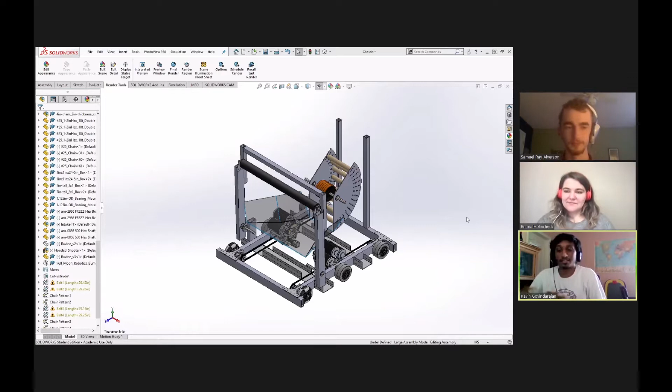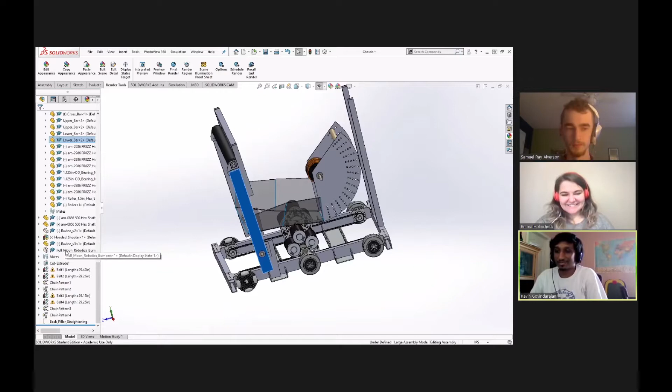So I'll walk you through the robot a little bit. So this right here is the overall structure of the robot. As you can see, you've got the main chassis drivetrain, you've got the intake right here, and we've got the ravine and the shooter. And this was one of the things I was saving for the special reveal right now. Earlier today, I spent some time modeling this beautiful bumper with our logo on it, just to give it that extra level of flair. That's excellent. I love it.

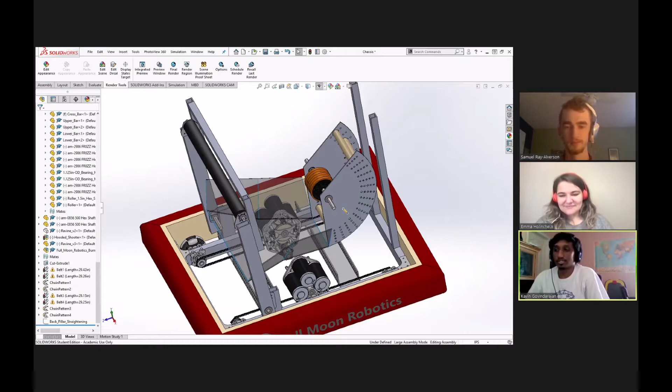So a little bit about the CAD. As you can tell, it's still a little bit bare bones. What's missing on this model right now is the electronics board, as well as any fasteners. And then the one major component that's still missing is the structural support for the shooter itself. The reason behind that is I am waiting for the dimensions from the in-person team. They had a lot of work to do today, so I didn't want to get in their way. So that's the last thing we're waiting for, the main structural stuff.

And then I've had to forego the electronics board and fasteners, partially due to time constraints since it was such a short time working on this. And also my computer was starting to struggle a little bit with the sheer amount of parts in there. So on the list for next year is a new computer for me.

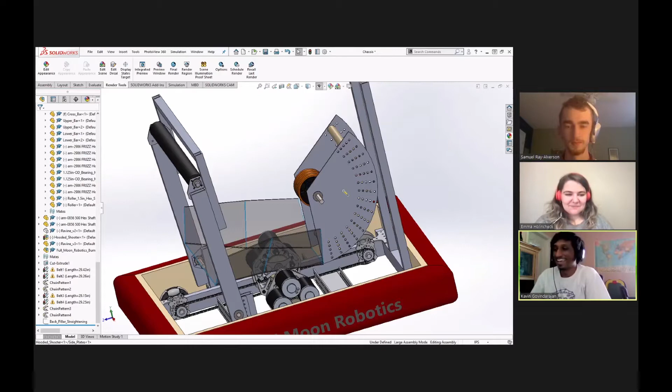Yep. And like I was talking about earlier, I had 3 different engineering processes I had to take, which was an interesting challenge working at home. Since we were redesigning the robot from last year, the first thing I had to do was reverse engineer the robot, like I mentioned, using pictures and working with the team in person. I had to basically reverse engineer the entire drivetrain portion. But when it came time to do the shooter, which I just pulled up right here, that was something we were developing new for this season.

So I worked in conjunction, in parallel with the in-person team at the RoboDogs workspace, and we were on call discussing dimensions, trying stuff out in CAD and in real life at the same time to design this shooter that we're using on the robot.

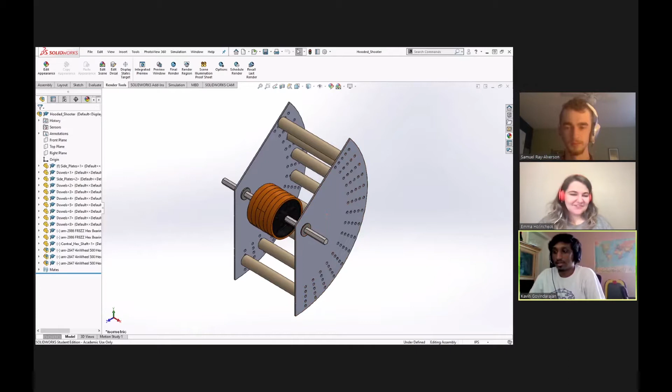And then the third process I had was with the ravine. And this was particularly fun, let's say. So this was something that I designed from scratch purely in CAD, because once I had the chassis CADed and the motors and everything in place, I now had a set of constraints to work with, and it was easiest to put it all in CAD and figure out what angles and dimensions all work.

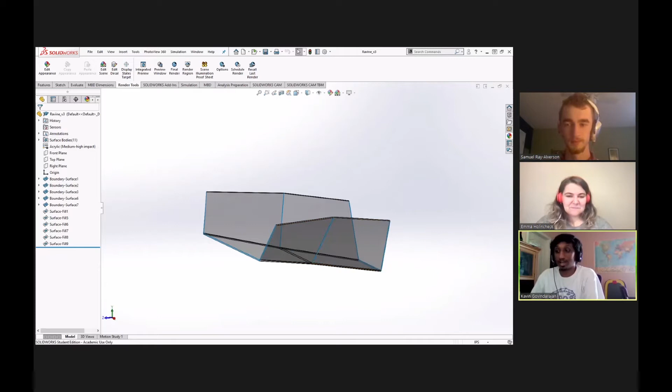So I spent a long time developing this in CAD, doing a bunch of 3D sketching, as I showed earlier, and finally came upon this final product. I sent these dimensions over to the in-person build team earlier, and they got it built, and it's on the robot now. So yeah, overall, CADing this robot has been a pretty fun experience. I've learned a lot, and I hope people watching the stream were able to learn a lot as well.

Incredible. Wow. Yeah. Cannot thank you enough for all of the hard work you put into this and how useful your work was for our in-person build team. So thank you again, Kavin. Absolutely. Is there anything else you'd like to share with us or anything else you'd like to say?

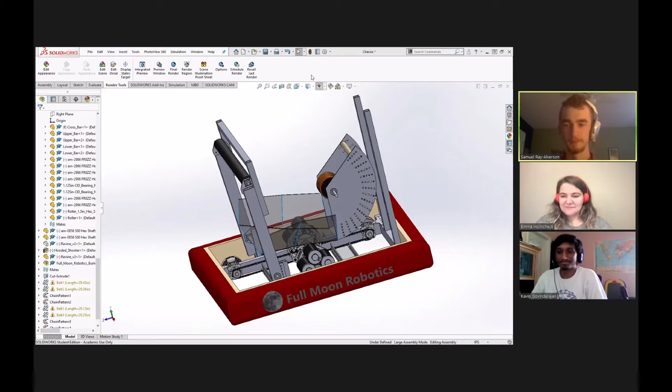So let's switch over now and let's talk to our programming team. Let's hear from Trevor. Trevor, how are you doing? Doing well. Good, good. All right. As I said to Kavin, it's been a very long 3 days. Where'd you start and where are you now?

Well, we started with last year's code, and there were a lot of things that were not entirely optimal, and a lot of things on the robot changed. And so over the past 3 days, we've sort of taken last year's code, and most of it's been rewritten. So yeah, it now accounts for all of the new subsystems and all of the new changes to the robot, including the shooter. We fixed some things with the control panel mechanism, and we made a whole bunch of other changes to it. We also did autonomous work.

And yeah. Excellent. Right. As of now, we have made 92 commits to our repository over the past 3 days and 18 pull requests. Cool. Wow. You guys have been working hard. We really appreciate all the work you guys have been doing.

All right. So tell me a little bit about the challenge of being virtual while working with a robot that you haven't seen before and you can't actually get your hands on. It was definitely a challenge because I'm used to sort of getting up close while I'm developing things so I can see, like, is this motor turning the way it should, or is this feed through the shooter working properly, which is a lot harder to do over, say, Zoom, but we made it work.

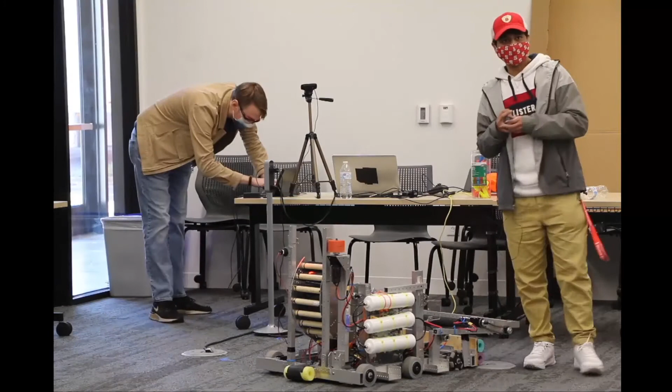Sure. On the back here is our shooter, which took a while to design. So basically our design process really early on in day one, we were thinking, okay, we want to score high goal, and we want to be able to score high goal from different points on the map. So how can we accomplish that without changing too much that we already had on the robot? So we came to the conclusion that a hooded shooter was probably the best idea to go about that. And we immediately began prototyping, designing, sketching out different strategies to make a hooded shooter. So that's pretty much what we have right here.

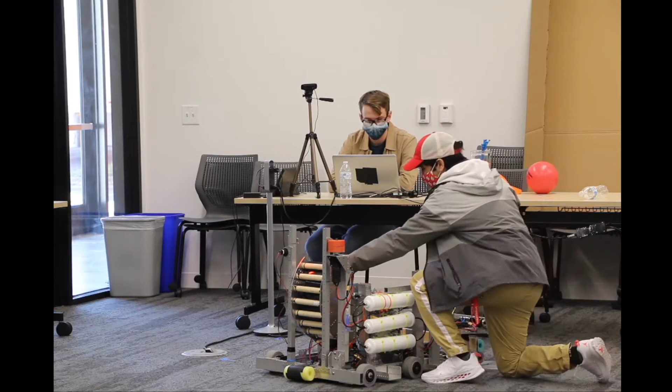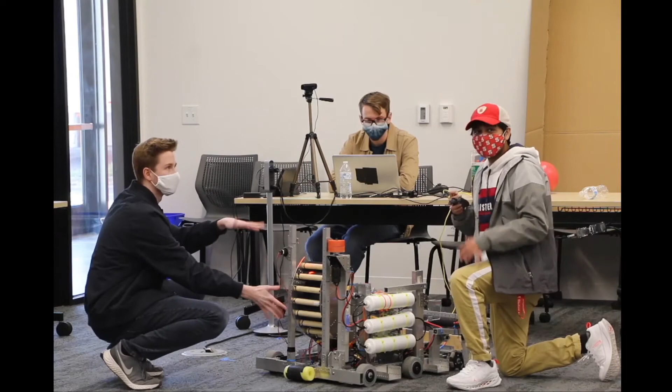The shooter has two hoods on either side with multiple holes so that the wooden poles you see on the back here can be put into any of the holes to adjust ball compression. So we have a lot of variability with this shooter. And there are three main flywheels here that direct the ball through. The ball comes in from underneath, up and out the front.

Hey, just one thing real quick. I don't mean to interrupt. Can we get a closer view? Because we're looking really far away right now. Yeah, let's see. Can you guys see the second camera?

I can see the second camera. Okay, we can see it now on the stream. Sorry, I didn't mean to cut you off, but also we couldn't see what you were pointing at.

All good. So yeah, from the second camera, pretty much the ball comes through the flywheels, comes out the front. At first glance, the shooter may seem pretty simple, but there's a lot of math that actually went into this.

We had to find pretty specific dimensions for this. We had to get a couple angles, and we had to find the angle of release that the ball should have too. Now, a little underappreciated piece right here is probably these indexing wheels that we added at the front.

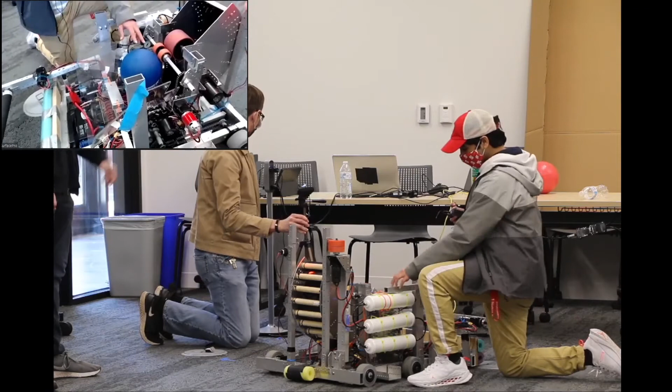Pretty much when the ball is sitting in the hopper idly, the wheels will just slowly run backwards so that the ball won't enter the shooter. Then once it's time to shoot, we let the shooter wheel spin up to full capacity, and then the wheels will push the ball underneath into the shooter. So these wheels are doing a fantastic job out here.

The last thing I want to talk about before I hand it over to Jake is this hopper, which we kind of started coining the term ravine, because when Kavin and I were talking about designing the CAD file, the best way we could describe it was like a ravine in real life. So that's what this became really fast.

Kavin worked hand in hand with us on this. He took what we'd given him in dimensions, gave us back the exact dimensions, and we cut it out of polycarb and put everything together, and it worked out exactly how the CAD model shows. So anyone wondering if CAD is useful? Yes, it's amazing.

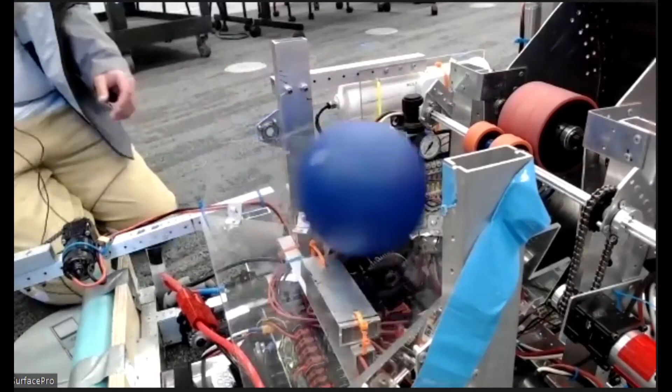So the ball comes through the intake, gets caught up here, and it's completely gravity fed. The ravine rolls the ball down, and once it's on the indexer wheels, they'll send the ball through the shooter and shoot it out the back.

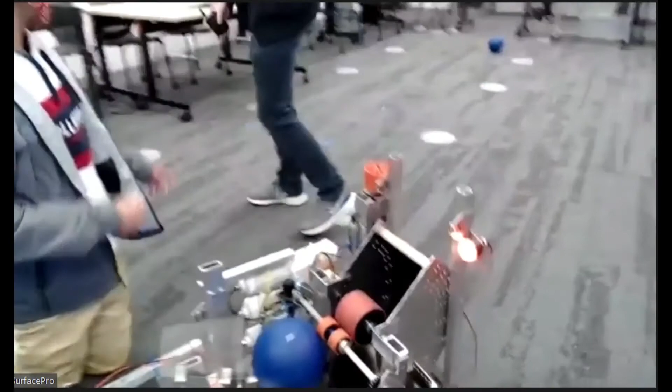Very nice. Can I ask you a question real quick? Yes. So how did you come up with the geometry for the ravine? Because for people watching, it seems like, oh, well, you could just put a piece of plastic there and the ball's going to roll down no matter what. What specifically about that geometry? Why is it the way it is?

Yeah, it's a great question. A lot of this design, out of all the stuff designed here, surprisingly the ravine was one of the things that took the longest to make. That's because with this season and how the balls are created, they tend to stick everywhere. They tend to stack on top of each other. They squish against each other. They kind of just get into messy situations.

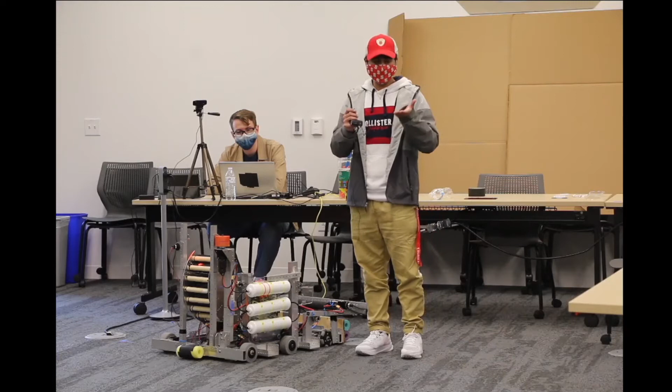So we wanted to make it as smooth as possible and also never have an issue where two balls could jam side by side and not go into the shooter in a single file line. That being said, our original design was just a simple flat ramp going down, gravity fed towards the shooter, with two other ramps simply going up from the side. Then quickly we realized that would be a little bit thin. Our intake is pretty wide and we wanted a lot more space for the balls to come in at a wider angle than be compressed down.

So a lot of experimenting with that and talking with the CAD team led to the current design, which is a ravine broken in half into a bigger ravine that has a large entrance. We'll just call it the hopper. The sloped walls are pretty essential to this. They're all sloped at exactly 120 degrees so that the ball has no interference with other balls, and we can fit three pretty perfectly. So it took a lot of planning out.

Very good, very good. I like it. Awesome. I think unless there's anything else you guys want to say or talk about.

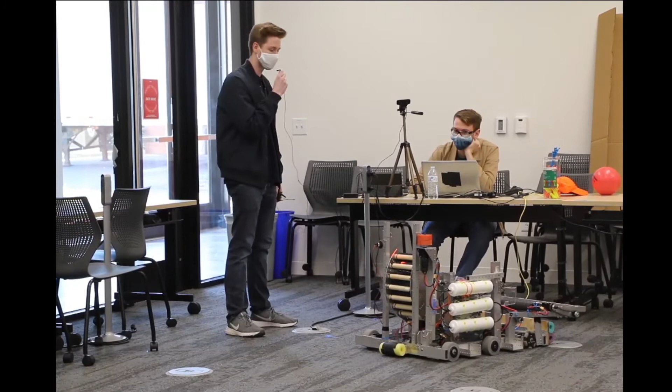I can touch quickly on the other elements of the robot. Tejas did a really good job talking about the ravine and the launcher, which are probably the two most unique and different elements of this robot from last year. But if you look around like an I Spy puzzle, you'll notice that a lot of elements or parts from last year's robot got stripped and reused in different ways. Like the indexing wheel Tejas was pointing at, that was previously used at the top of this robot to index into a low port shooter last year.

And some elements are still there. We just used them and repaired them, as in this control panel element right here with the piston and all the pneumatic tanks. We had to do a bit of fine tuning there.

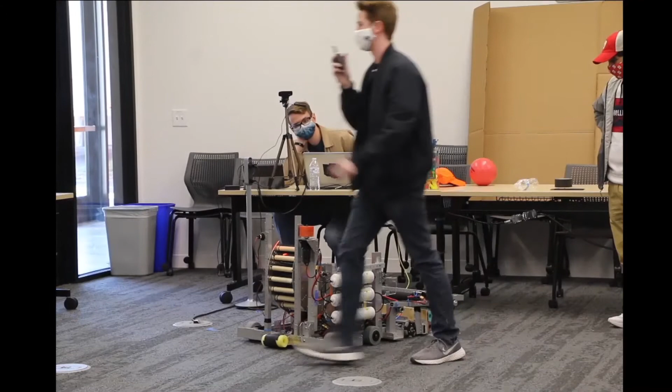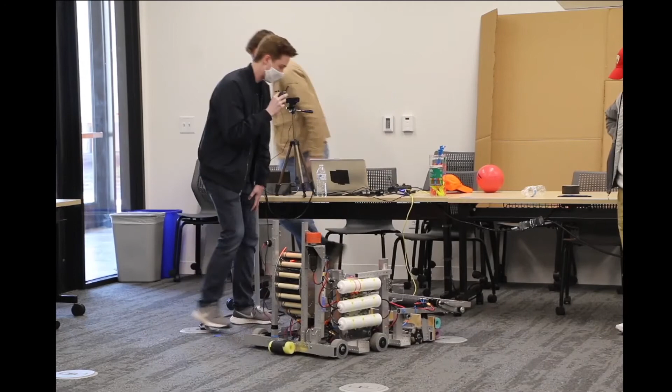On the intake, it is mostly still the same, but as we talked about on the first day of our stream, there was the roller right here that was falling out. On the other end, hold on one second, we can't see the intake, we're looking from the back of the robot. Okay, the second camera angle gives you a pretty good shot of the intake. Can you move the robot back a little so we can see the whole intake? Sorry about that, thank you.

That's fine. So on the second camera, this side of the intake, the roller was falling out. It was loose, not very good for what it could be. So with some specialty made parts and changes to where it was located in the frame, we were able to secure it and make it much more reliable.

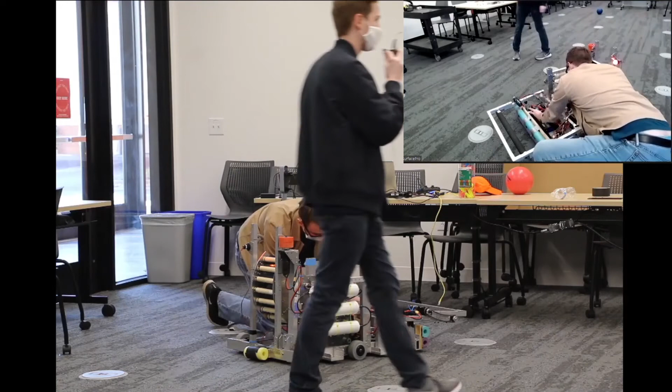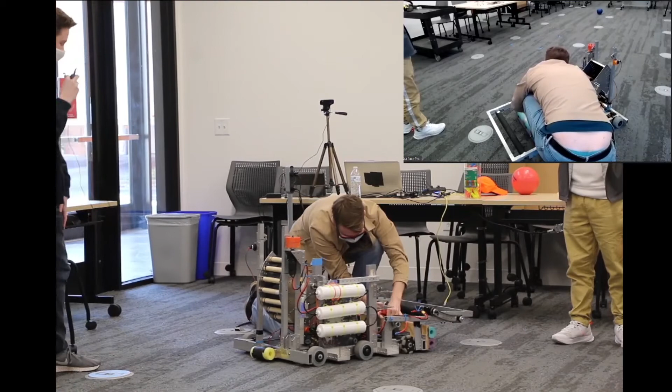Nice, but I can field any questions on any of that. On the electrical stuff, small changes like the RSL was moved to a higher point, so it's not falling off into the frame of the robot. And funny enough, the CAN bus wire is not over the battery anymore, so now you can quickly change the battery without destroying your electrical wiring.

Awesome, hallelujah, excellent. So are there any additional questions before we start getting this moving and talking about it more? I don't think so, I think we're all just excited to see it drive, see what it can do. Awesome.

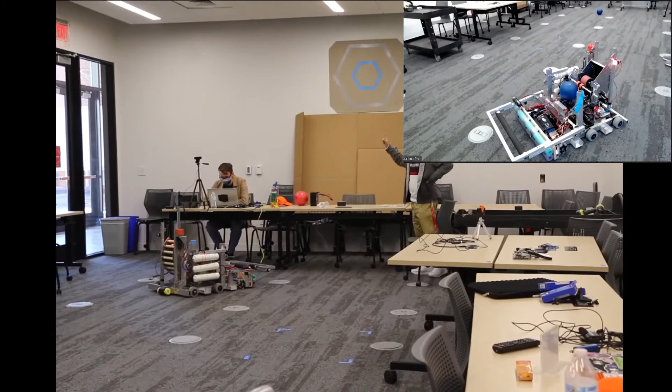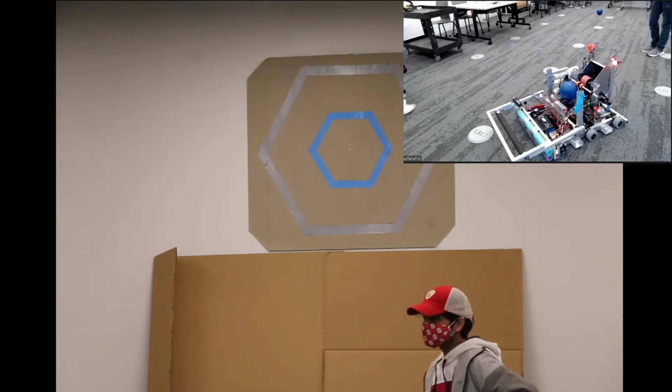Well, as it is connecting and being prepared, we have on the wall up here a high port for us to be shooting in. As it says in the manual, you are able to make a 2D port shot. There's a lot of specifics on how to score using that, like the percentage of the ball within those areas. I highly recommend that if you plan to use a 2D port for your shooting, you look into those specifics to make sure you're calculating your score correctly.

Did you set the RPM correctly?

Hey Tejas, quick question for you. Yes, what's up? How did you come up with that 50-degree angle, why did you choose that? Great question actually, that took surprisingly longer than expected. Originally I kind of knew that since we were a low hooded shooter bot, we'd need a steeper angle, and the most average or regular angle you can pick is 45 degrees for a shooter that's shooting a ball out. This whole shooter mechanism drew inspiration from other teams all around, and once I realized most teams were going with 45 or 40 degrees but with higher up shooters, we could imitate that, but with 50 degrees since our shooter is pretty close to the ground.

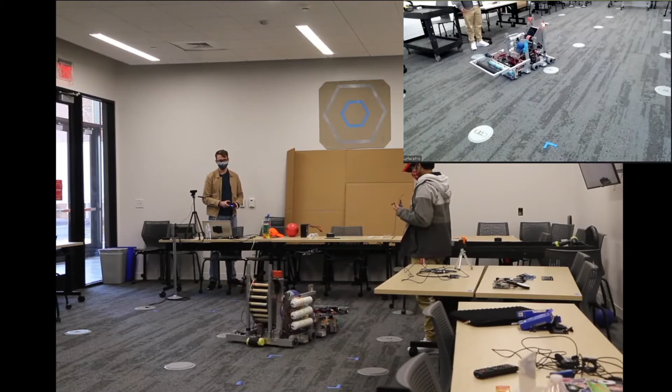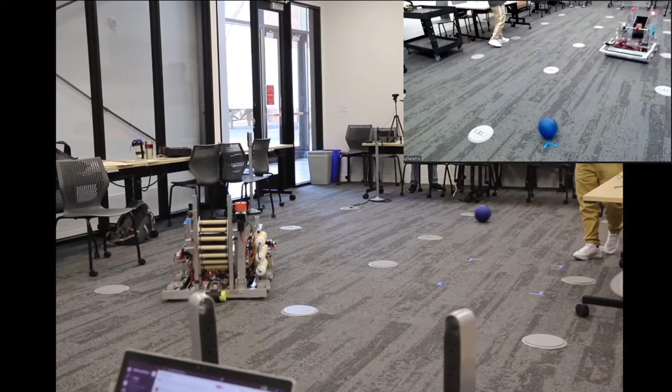So, is there anything you guys would like to see on stream right now? We'll watch anything as long as it's robot related. Anything you want to show us? There's the solid intake.

Nice. Yep. Would you guys like to see an auto routine now? We can run one of our autonomous routines. Make sure the gyro is set up for you guys.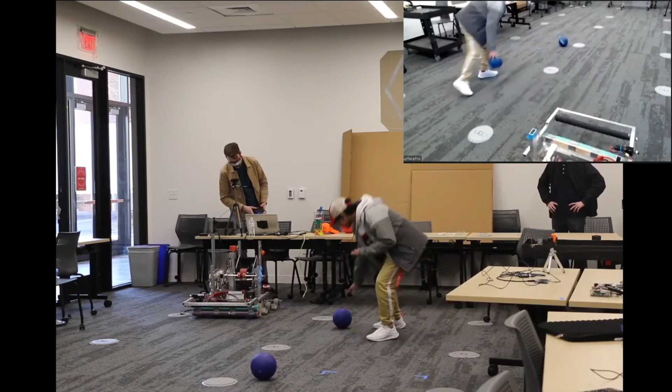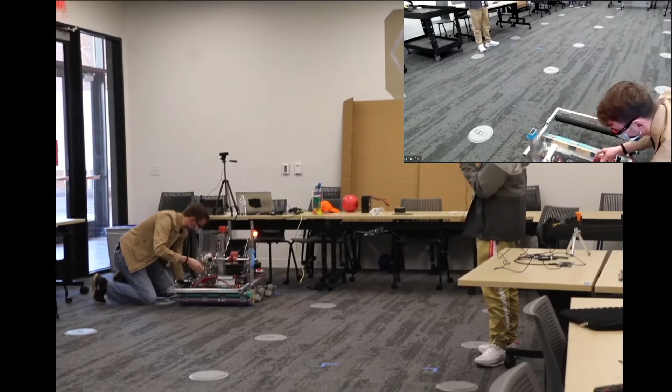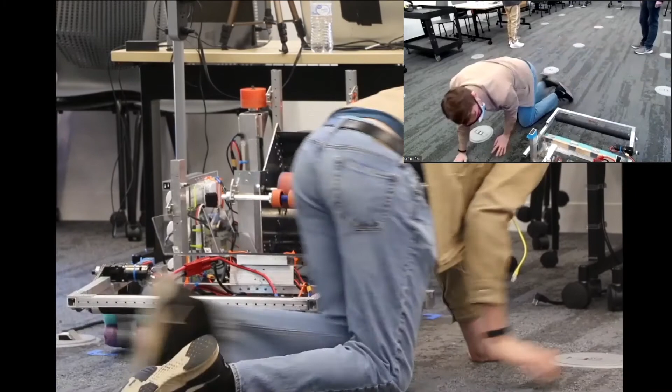So yeah, from that, as you guys can tell, the intake works pretty well. There do need to be some adjustments on the hopper to extend the length forward a little bit, maybe make it easier to catch some balls. And we do need to spend a little more time testing the shooter, testing the indexing and everything, so that the balls can release more consistently. But overall, considering that we kind of just built the entire shooter at another space, brought it here, and slapped it on the robot first thing, tried it out this morning, I think we're pretty happy with how it's shooting balls today.

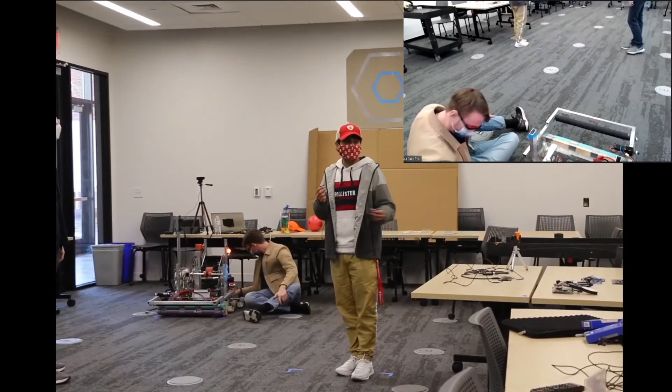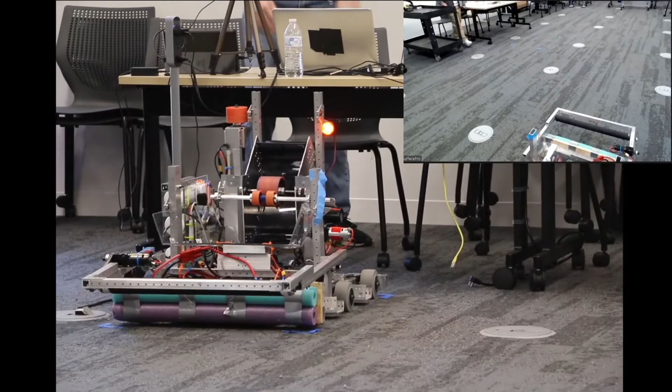Yeah, it absolutely looks great, especially for the 3 days you had to work on it. Like, the first time we tested it was about 5 minutes before this meeting started. No worries with that, I'm sure the time constraint is very difficult, but teams watching this would have more time to test than us, who had a very short amount of time.

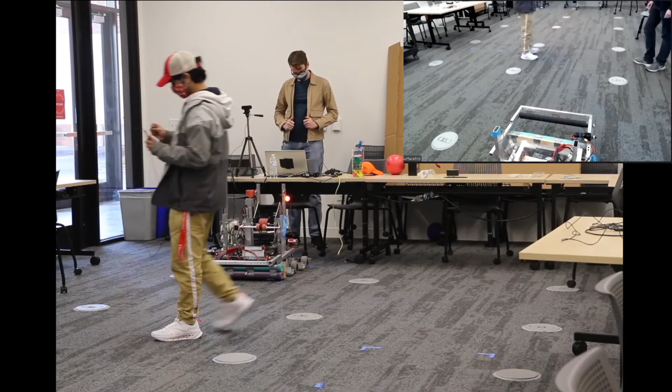So the concept here works. On the topic of things for teams to consider, one thing you might have noticed is we were having a little issue with the intake itself. Sometimes we get stuck in the intake. With some additional development time, that's probably one thing I'd suggest teams look out for. When designing an intake, you want to make it as wide as possible so your drivers have an easier time intaking power cells, but you also want to make sure you do a good job of getting those power cells into the robot and keeping them in the robot. As you can see, when we drive around, we're prone to losing some power cells.

Kevin, question real quick, or either one of you, what changes would you make to the intake if you could right now? I guess I'll start off.

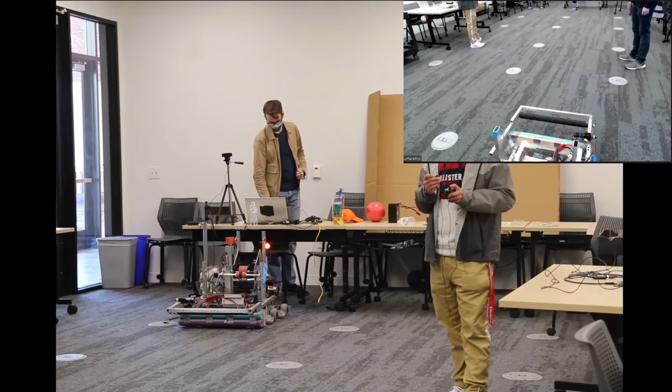So in my opinion, I would probably add some sort of vectored intake wheels onto the intake. Vectored intake wheels are basically like small Mecanum wheels, and the rollers on them let you direct the balls towards the center of the intake. The reason those are nice is because you can approach the ball from any angle and keep as wide an intake as is allowed within the rules. It'll help you center the balls and make it a lot easier to keep them under control. The next big thing I would change is for the intake itself. Right now, once we drop it down, we have no way of bringing it back inside the frame perimeter unless the round is over and we have our drive team pull the intake back up. So I would probably add pneumatics, like a piston, to control the actuation of the arm itself, because being able to bring that back into frame perimeter means we can take some hits from robots. Right now, it's kind of hanging out and vulnerable to getting hit by other robots.

Awesome, thank you for that insight, Kevin. Tejas, I think you have something you'd like to share. Yeah, also about the intake.

One thing we noted from last season was that normally you want the ball to be touching some sort of roller, some sort of wheel, some sort of control mechanism at all times, which is something we could probably improve on in the future.

Normally touching some sort of thing that controls the balls at all times is kind of making sure that you always have full control over the ball and know what it's going to be doing, so there's no variability.

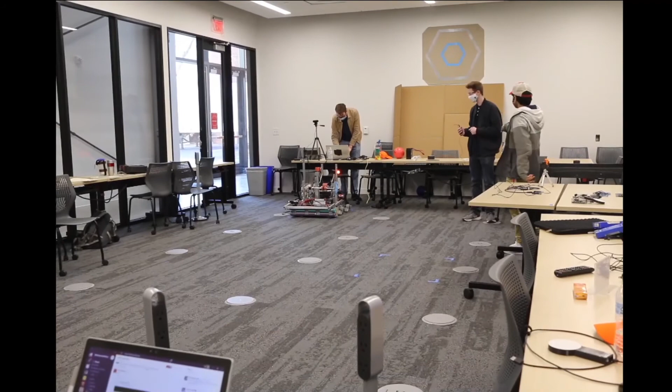Awesome, thank you for the heads up, Trevor. And if you want to see a video of the robot doing this more, it'll be on our YouTube channel at Full Moon Robotics. I believe that was uploaded yesterday.

All right, we're going to go ahead and send the auto off. 3, 2, 1, go.

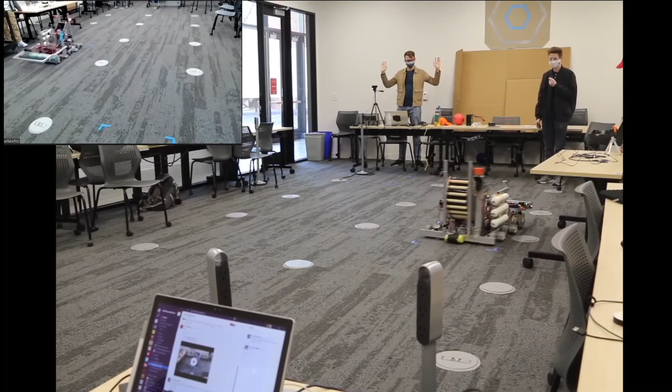Woo! Awesome. Awesome. Thank you, guys.

That is right. So, briefly mentioned earlier, the control panel mechanism on the side here - we can show that actuate and spin. That'd be awesome, that's actually what I was just about to ask.

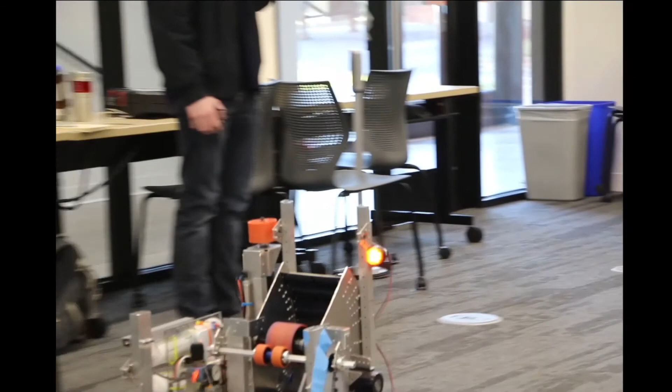And if Infinite Recharge were to have competitions in person, control panel mechanisms such as that would have increased value this year. Just as when reading the manual, you'll notice that the control panel points actually have more value this year. Yes, that's very interesting.

One quick question for you - how is that going up and down? What kind of mechanism is that? Can we maybe get an up-close view of it?

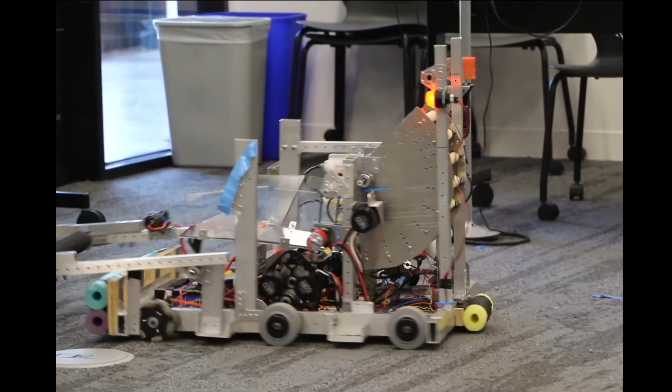We could. Sam, do you want to drive it over closer to you? Either camera works. So the actuation of it going up and down is from a piston on the side of it, as the motor and wheels themselves run on a track within some channel. Once the piston actuates up, the whole system goes up through this channel with the piston.

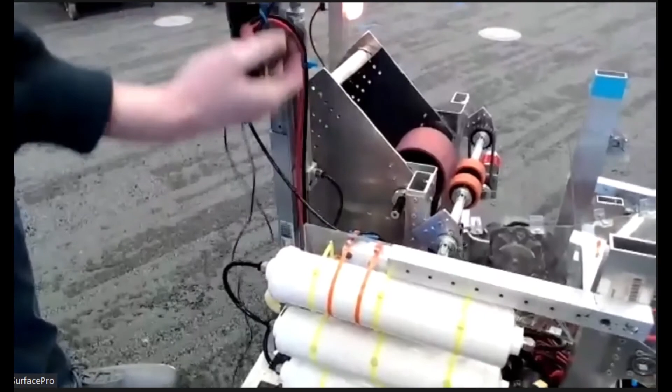It doesn't look like the piston's doing much, but that's because it's upside down. So the actual piston that comes out is behind the air tanks. Awesome.

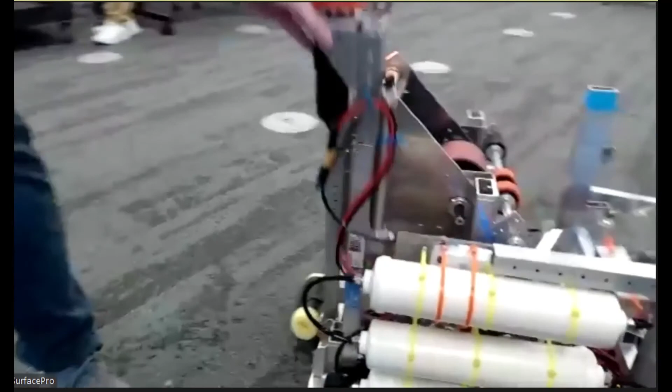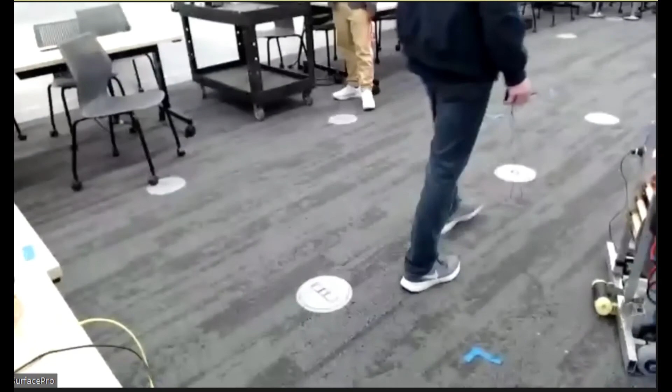Well, is there anything else on the robot you guys would like to show off? I think we've kind of covered most parts of it.

But I would like to say, definitely stay tuned. Hopefully we'll be filming a reveal video soon, and that'll be out too over the next couple days. That'll kind of showcase again everything we've done in this presentation, what else the robot has, hopefully with some cool music to it. So you guys can check that out on our YouTube over the next couple days.

Well, thank you very much. We really appreciate it. You guys have worked very hard, and I think the hard work has really come through, and you can see how well the robot works. Nice work, everybody, and thank you very much.